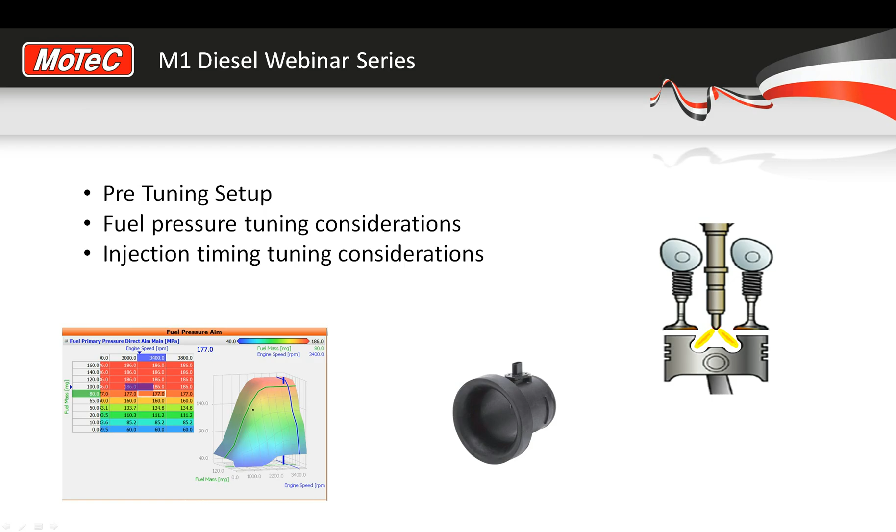This webinar is about some of the things you need to get right on the engine with calibrations, before you start your tuning. We're going to finish today by making sure you've got your head around injector timing considerations - what affects injector timing, what an injector timing curve should look like, because it's quite different from ignition timing on a petrol engine.

Alright, to get started, we've got to have the right sensors on our engine and the right calibrations. This sounds quite simple, but one of the first things you come across as being a little different on a diesel is the fuel pressure.

The fuel rail pressure is very critical to the fuel strategy inside a diesel engine, because we have a huge variation in fuel pressure. A significant amount of our fuel is delivered proportional to the fuel pressure going up and down. Just to pick some numbers, say 50% of the fuel delivery is via making the pulse width longer and shorter, and the other half comes from lifting the fuel pressure up and down. So it's a significant part of tuning a diesel.

So we need to make sure we've got the correct calibration for the pressure sensor on the common rail. Okay, assuming you've got that right, the next sensor to worry about is the boost pressure sensor. The reason I mention this is because it's very common to be lifting boost pressure a long way outside the range of the factory sensor.

The factory engine might be running 14 pound, or 1 bar of boost, maybe 1.2 bar. Your version or your tune-up might end up running 2 bar, 3 bar, 4, or even 5 bar of boost. It's quite easy to do in a diesel - double the boost and double the power.

Alright, so some starting points for tuning. It's nice to load in some known or start values. One of the critical ones is fuel pressure and injection timing. As you'll learn, injection timing is not that easy to predict, because it really is interlocked with fuel pressure. The higher the fuel pressure, the shorter the pulse width can be, and the pulse width is what determines effectively where the injection point should start. So if we have a very long pulse width, we need to start that pulse width earlier in the cycle so it doesn't burn too late down the exhaust side.

I've got a graph coming up to show you that again. Alright, so we need to consider that. But most of the time the fuel pressure curves are reasonably standard, as far as they can be similar amongst a lot of engines, as far as high fuel pressure at high loads and lower fuel pressure at lower loads.

Now, just a note on fuel pressures that isn't to do with power, and that's to do with the fact that the intention from OEMs is to have fuel coming from the injector nozzle at a pressure that pushes the fuel out through the multiple holes and fills up this piston bowl area here. In an ideal world, that bowl area would be completely filled with a nice mist of diesel and air, and once it lights off, it's got good distribution around the combustion chamber. So the OEs try not to have the fuel blasting into the side of the piston wall, because that can cause erosion and cracking and things. They want fuel pressure high enough to fill the area, but not so high as to do a water blasting effect.

Having considered all of that, the higher the fuel pressure you can run in general, the better. The higher the fuel pressure, the better the atomization, and the better the fuel reaches all the different corners of the combustion chamber. Now there's a couple of limitations. If we run excessively high fuel pressure at very low fuel requirements, then we end up with a very short pulse width. So if our fuel pressure is so high at, say, idle, that our pulse width to deliver the correct amount of fuel becomes too short, then it can go underneath what the dead time of the injector is.

So to give you an idea, we might have 10 microliters being requested to be delivered at a fuel pressure of 96 MPa. At 96 MPa at 10 microliters, our fuel delivery is 0.429. If we come down to 2 microliters, which is almost nothing, it takes 0.315 of a millisecond, or 315 microseconds, for the injector to deliver 2 microliters. So that gives you an idea of what the dead time of the injector is.

Alright, so basically this page just goes further into that exact scenario. I kind of jumped ahead on you there. So that's the scenario again, just showing you that if your fuel pressure does fall for whatever reason, if you hit a fuel pressure relief valve and it stays stuck open, that's pretty much exactly what will happen.

If the fuel pressure spikes when the driver lets his foot off the pedal, because the demand for fuel goes to almost nothing on overrun, and the pump or the fuel system doesn't have a bleed back to the tank, then it's common to get an overspike in fuel pressure. Now you have a relief valve for that, and on the old mechanical relief valve systems, the relief valve can sometimes jam open, and you end up running around the track at a very low fuel pressure compared to what you tuned it.

Alright, so just a little bit of tuning tips on setting your fuel pressure table up and how to tune fuel pressure, closed loop fuel pressure on a diesel.

So this is a pretty typical curve on the right hand side of what a fuel pressure aim map would look like. Starting down the bottom, we've got our fuel flow - actually in our latest software, it is fuel flow estimate, maybe fuel mass. Oh no, that's right, the fuel flow estimate's on the feed forward table. So this is your fuel mass going on the vertical axis, and as you demand more fuel, you can demand more fuel pressure.

Why do we want more fuel pressure? As we want more fuel so that we can keep our pulse widths as short as possible. Why do we want our pulse width short? Because if we have a very long pulse width and we're still delivering fuel after top dead center, we can have fuel still burning, going well down the exhaust stroke, or well down the power cycle at least, and that can give you boost control problems, and obviously you don't make a lot of power by having late injection, and you can have smoke problems.

So we want to keep our pulse as short as possible. As the pulse increases, we increase our injector timing, but you get to a point where if the injector timing is too far advanced, you build too much cylinder pressure pre top dead center, and you can damage the engine. So there's only so much advance you can put on your injector timing. So the rule as a starting point is to try and keep that injector pulse width as short as possible, and having high fuel pressure is a way of doing that.